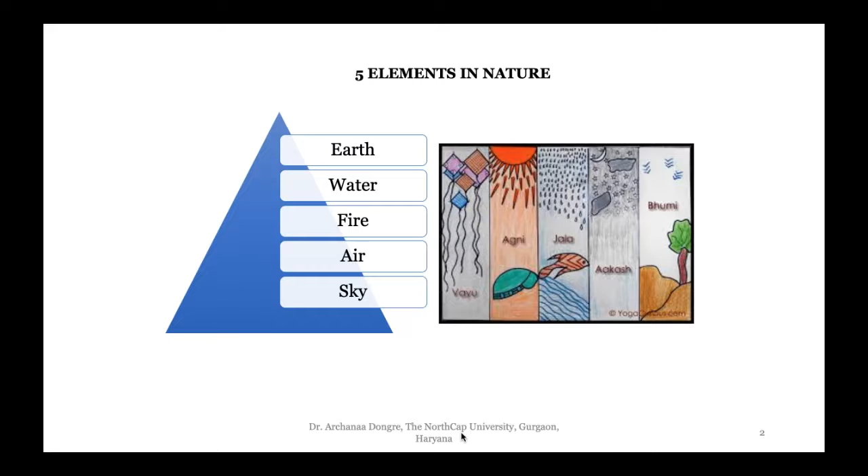We are actually working on each and every element, and there are a number of branches evolved based on these 5 elements. In fact, total elements are only 5, but branches are maybe more than 10. I have specified here very few, like structural engineering, environmental engineering, water resource engineering, transportation engineering, geotechnical engineering, earthquake engineering, remote sensing and GIS. So many engineering branches, so many things are there.

We are literally progressing, but then why this trouble? Why are we facing this danger of earthquakes and overall imbalance? Currently we are in a lockdown situation. Somewhere most people also consider it a blessing to nature, because work has stopped, and nature is getting time to go back to its originality. So water is getting clearer, air is getting purified.

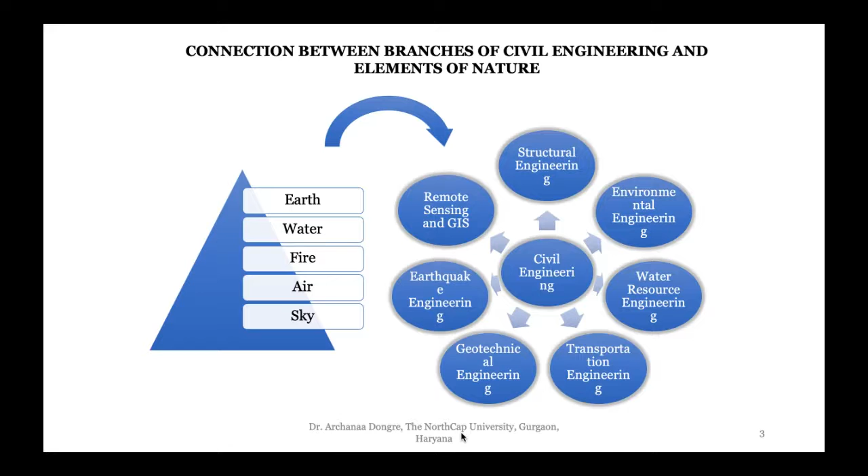Coming to civil engineering students, I always ask - it's the moment we enter civil engineering, mostly we ask, whatever structure-related problem we solve, every equation we solve, what is that basic principle? In civil engineering, the equation of equilibrium should be satisfied. That is very important. Equilibrium has to be there.

But we are part of nature. So nature and human beings, when they are in harmonious existence, there will definitely be harmony and happiness. But what is happening currently? The current scenario is totally opposite. We have literally exploited Mother Earth, and now we are in a questionable existence. This is the scenario we are facing, and it's actually very challenging. A challenging future is ahead of us. So if we do not step back and find a solution, think over how we can help in this scenario, we will be in trouble otherwise.

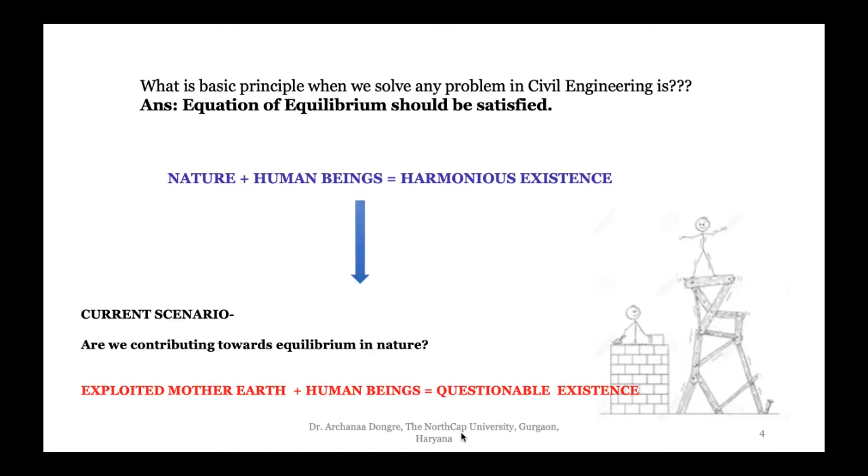Our India, our country, we have witnessed such a great civilization, and we have seen how without having great techniques, there used to be great structures in our country. Nalanda University is an amazing example - even now people are doing research on it. Then Mohenjo-daro is there, the Hampi Virupaksha temple is there. So there are many more examples of how ancient civilization managed all these things.

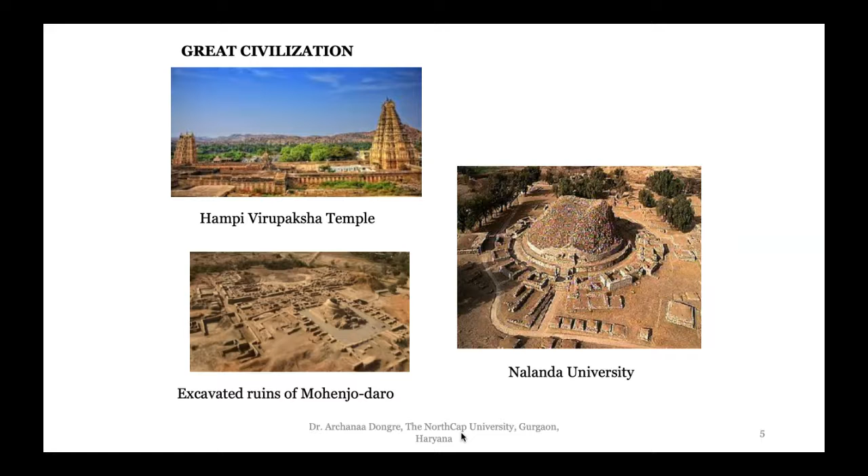Coming to villages in India, actually, if we see, villages are the ultimate. Villages are close to nature and they are actually sustainable. Now, every now and then we see government policies mention sustainability. Sustainable is the new definition of progress. But does that mean, because villages are sustainable, we are going to move towards the villages? No, that is not going to happen. But yes, we have to keep in mind that villages are ultimate - they are very good examples of sustainability.

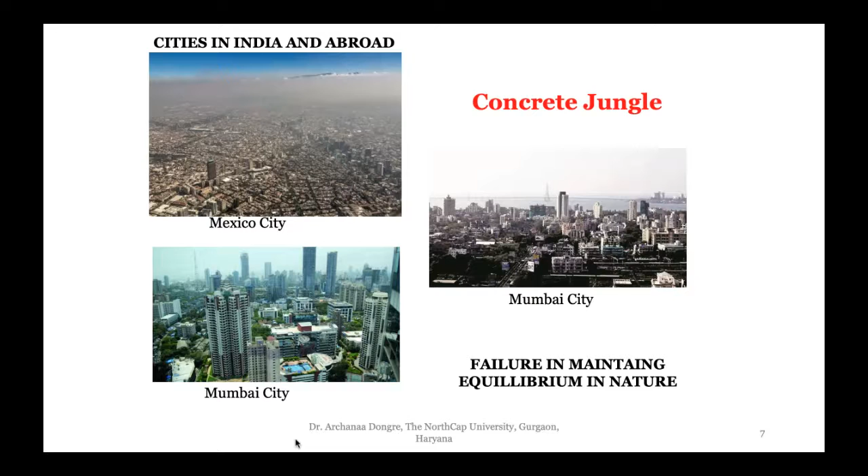Coming to our cities, it's full of concrete jungle. Take any city in the world - I have kept pictures here. This is Mexico City, then Mumbai City, full of concrete jungle, and we have utterly failed to maintain the equilibrium in nature. Those 5 elements need to be in balance, but we have literally failed in that. I have also kept examples of Delhi, Bangalore, Ahmedabad - the reality is that the 5 elements are not happy, they are not in equilibrium.

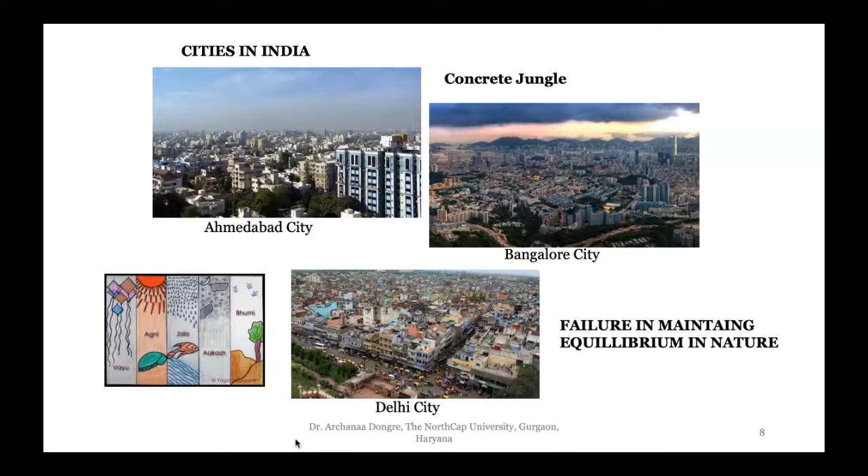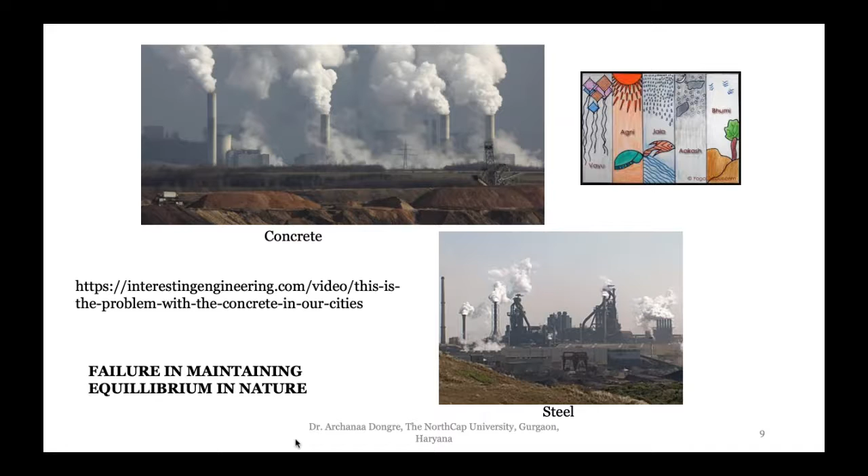Coming to pollution - air pollution. This above picture is of a concrete industry, and the below picture is a steel industry. See the amount of pollution. Everyone knows this - maybe I am giving a webinar now, so you are seeing this, but this is the reality. What action are we going to take? Being civil engineers, I feel we have to think in this direction, because we are the ultimate contributor to this - direct contributor to nature's degradation.

Other than this, there are many disasters. We see road accidents - 400 people die per day, and you won't believe it, now we are hiding in our homes due to fear of coronavirus, but in road accidents, 150,000 people die per year in India. Air pollution causes 12.4 lakh deaths in India, and 6.1 million people die worldwide due to air pollution. And if we add the data of floods, droughts, cyclones, then the number is so huge.

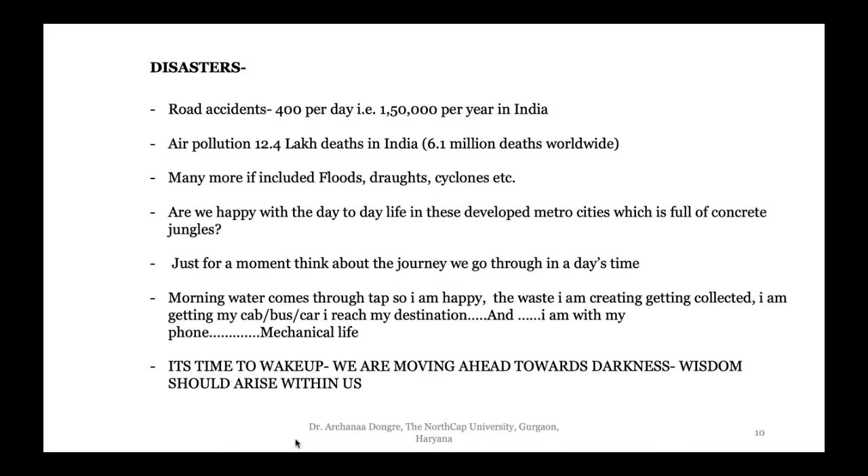So what are we doing? Are we happy with the day-to-day life in these developed metro cities, full of concrete jungles? Yes, we are seeing our satisfaction - our job is here, all facilities are here, and we are really happy that, okay, morning I'm getting water in my tap. And if I have to go to my office or university, I get a cab, a bus or auto, and it's all continuous from morning to evening. My day is very good, so I'm happy with this. But I think, yes, it's our time - it's a time to wake up, and we have to bring wisdom within us. Otherwise, we are continuously moving towards darkness.

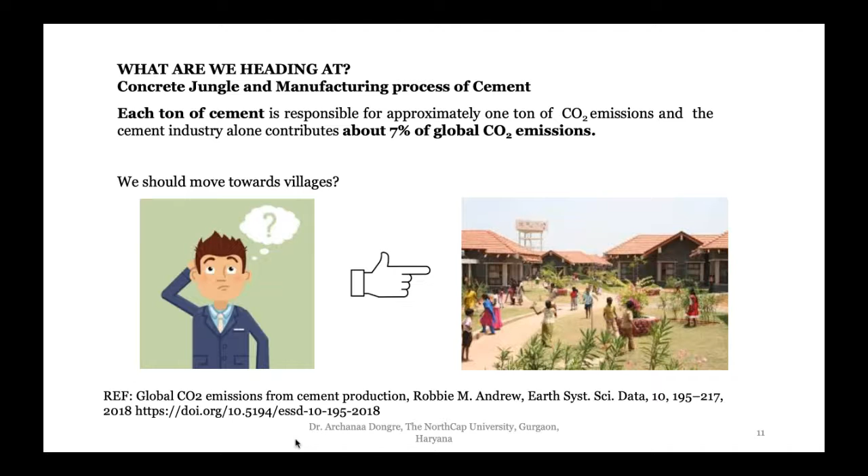Now so many times I'm telling cities and villages. Let's see what that ratio is. We'll come to that. But before that, for civil engineers, I would like to say, over the last many years...

The definition of civil engineering has evolved from directing the great sources of power in nature for the convenience of man — that was an 1828 definition — but now civil engineers are the custodians of the built and natural environment. This shift shows a fundamental change in the relationship between engineers and the natural world. Man and nature are not separate entities. Engineers today must design for a planet with limited natural resources, complex problems, and increasing environmental concerns. So civil engineers need to think and find solutions.

Number one is hold safety paramount — civil engineers need to be very careful that safety is there. Then, service with competence — one should be competent in their work. And issue true statements — here I see most of the problems, for whatever reason, so we are again going to come to that topic.

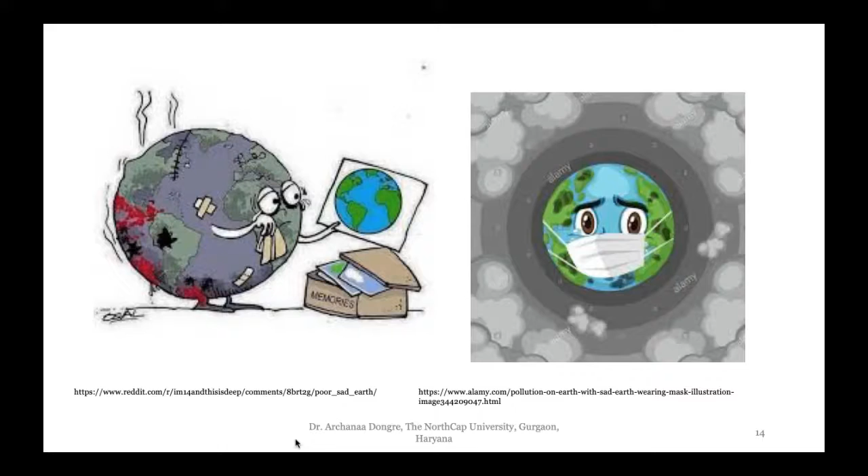Coming to earthquakes — these are beautiful pictures I found. We started the first lecture of this webinar series with this topic, and most of you have already been through the basics of earthquakes, but I'll briefly take you through that awareness again.

So are we really waiting for that big disaster to happen and our buildings to collapse? No. Then what is that? We really have to see that our buildings are earthquake proof. My topic belongs to rural areas, so I'll take you there too, but whenever it's going to happen, it's not in our hands — still we have to check that our buildings are safe or not.

If we are not able to check ourselves, there are so many websites available which will tell you whether your building is safe or not. IIT has also developed some software where we can see if our building comes in a safety zone or not.

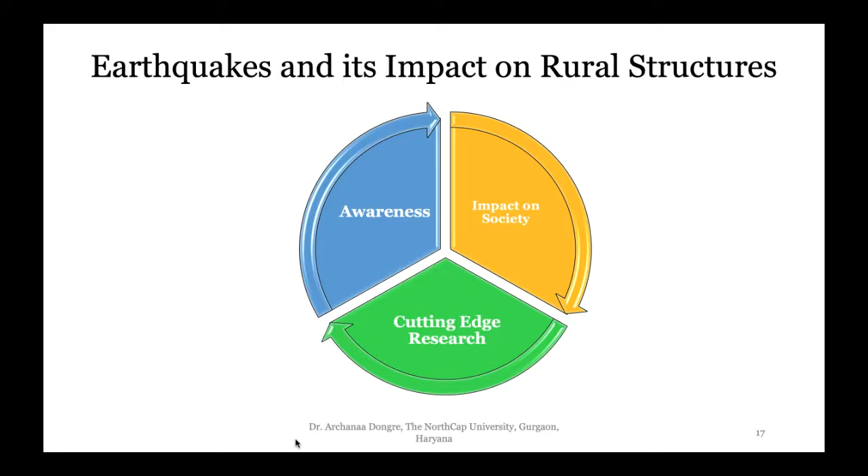How is your type of building structure? Is it not coming in a soft story effect? We have to check many factors, and we have to be really careful because yes, the North region is comparatively at risk, and we have to be careful about this. So this particular presentation is moving around the awareness about this whole earthquake and rural structures, then what is its impact on society, and what is the cutting edge research. That's how I have planned it.

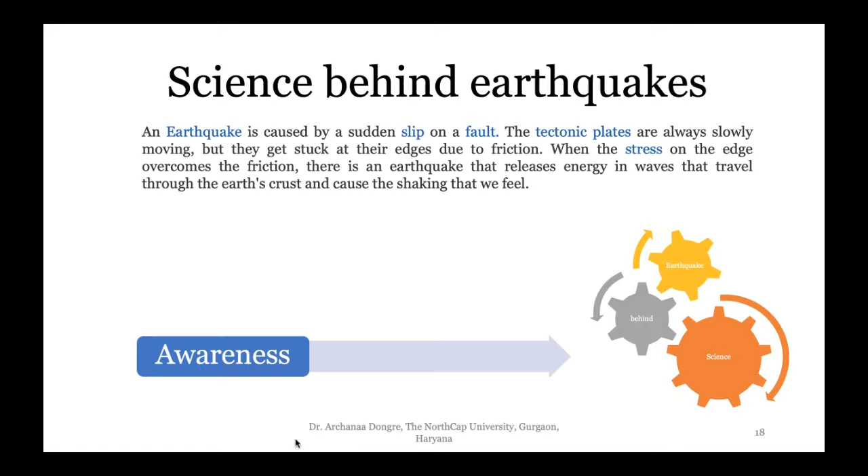Coming to the science behind earthquakes, an earthquake is caused by a sudden slip on a fault. The tectonic plates are always slowly moving, but they get stuck at their edges due to friction. When the stress on the edge overcomes the friction, there is an earthquake that releases that energy. And when they release their energy, it releases in the form of waves that travel through the earth's crust and cause the shaking that we feel - that is an earthquake.

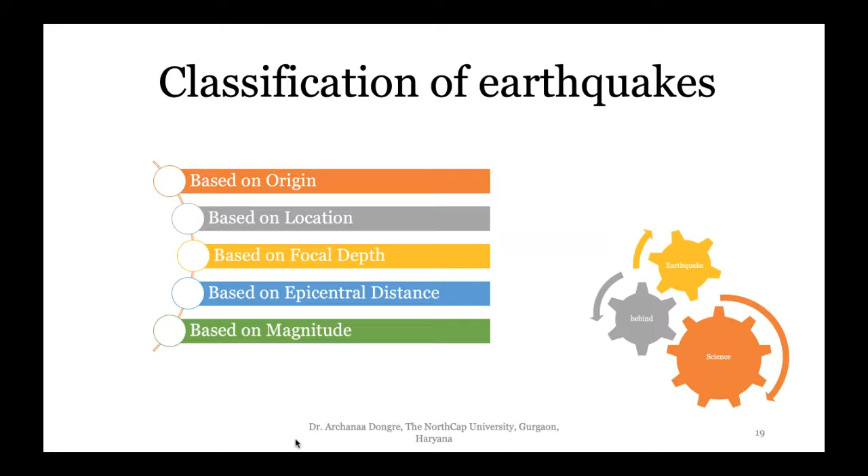Coming to the classification of earthquakes, there are a total of 5 classifications. Classification is based on origin, meaning where it has occurred, then based on location, based on focal depth, based on epicentral distance, and based on magnitude.

Based on origin, there are 6 parts. Tectonic earthquakes are caused due to the movement of tectonic plates, and they are generally of high intensity. Next is plutonic earthquake - these are caused due to the deep seated movement of molten magma, and they are generally of medium intensity. Then explosions - this is our contribution to earthquakes. The ground shaking caused by the release of enormous nuclear energy due to the underground detonation of nuclear devices. So this is humanity's contribution.

Then there are collapse earthquakes, volcanic earthquakes, and reservoir induced earthquakes. Reservoir induced earthquakes are specially attributed to the lowering of shear strength of the rock due to increased pore pressure in the vicinity of the reservoir, that is already strained from tectonic forces, and because of the storage of water. So this reservoir adds stress contribution which triggers a slip or increased pore water pressure, which lowers the shear strength of the fault. The Koyna earthquake is a very good example.

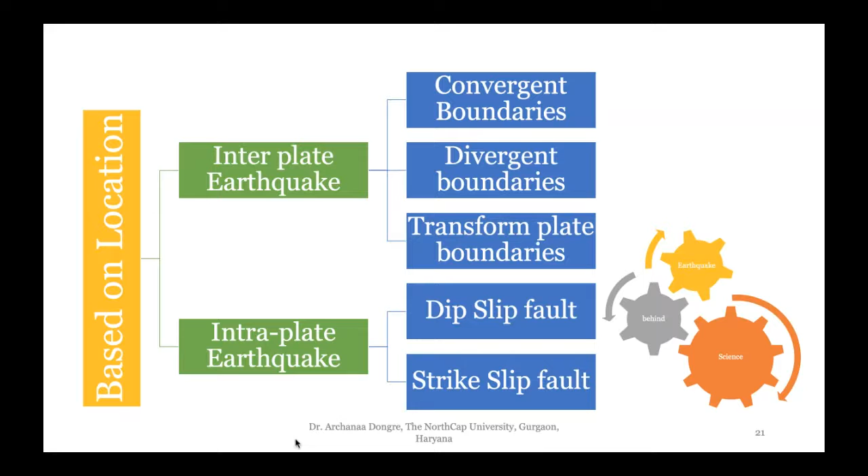Convergent boundaries are where tectonic plates move towards each other and give rise to mountains. Divergent boundaries are where tectonic plates separate and move away from each other. Transform plate boundaries are where plates slide past each other.

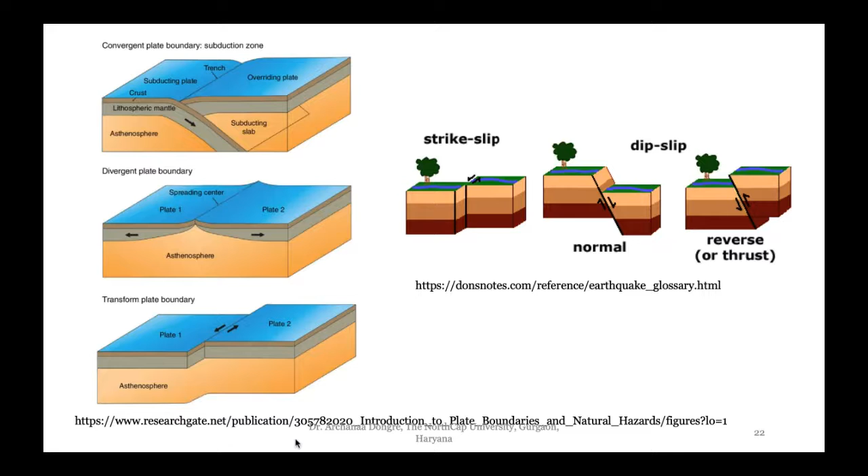Coming to intraplate earthquakes, such earthquakes occur within the tectonic plates due to internal rupture owing to the presence of faults in the rock strata. These fault boundaries are of two types depending on the direction of relative displacement: dip slip fault and strike slip fault. In dip slip fault, relative displacement of rock masses is vertical at the fault surface. In strike slip fault, relative displacement of rock masses is horizontal and sideways at the fault surface.

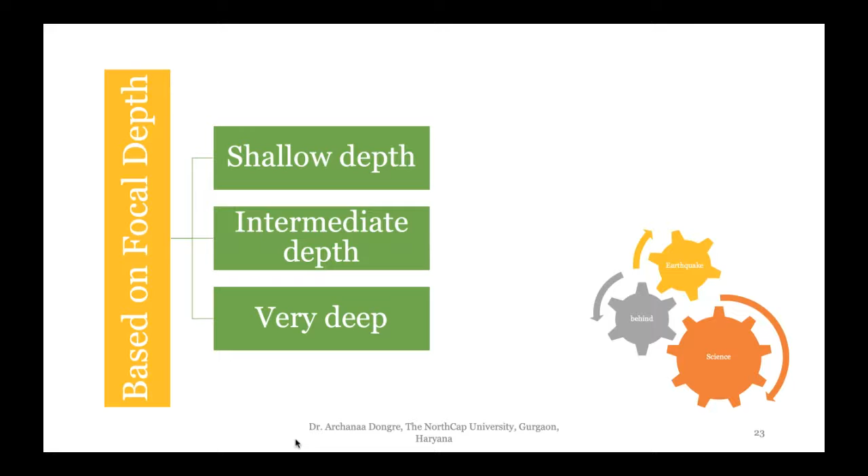Then the next type is based on focal depth - is it shallow depth? Mostly focal depth less than 70 kilometers, and it covers a very small area, and is severely destructive in nature. Next is intermediate depth - this occurs at a focal depth of 71 to 300 kilometers, covers a large area, and is very destructive in nature. The third type is very deep - these occur at a focal depth greater than 300 kilometers, cover a very large area, and are comparatively less destructive in nature.

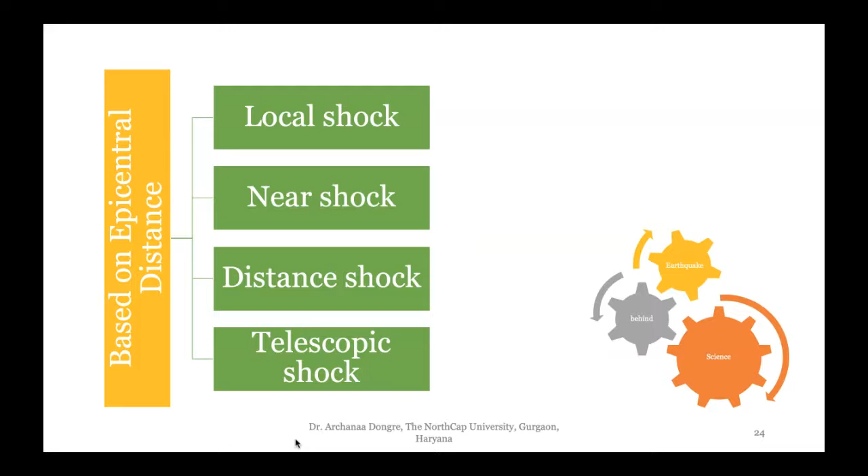Then based on epicentral distance, there are 4 types: local shock, near and far end earthquake - we say distant shock - and teleseismic shock. Then there are earthquakes based on magnitude: micro earthquake, moderate earthquake, strong earthquake, major earthquake, great earthquake, and intermediate earthquake.

Micro earthquake is where magnitude is less than 3. Intermediate earthquake is where magnitude ranges from 3 to 4.9. Moderate earthquake is where magnitude ranges from 5 to 5.9. Strong earthquake is 6 to 6.9 magnitude range. Major earthquake is where magnitude ranges from 7 to 7.9. And magnitude greater than 8 is a great earthquake.

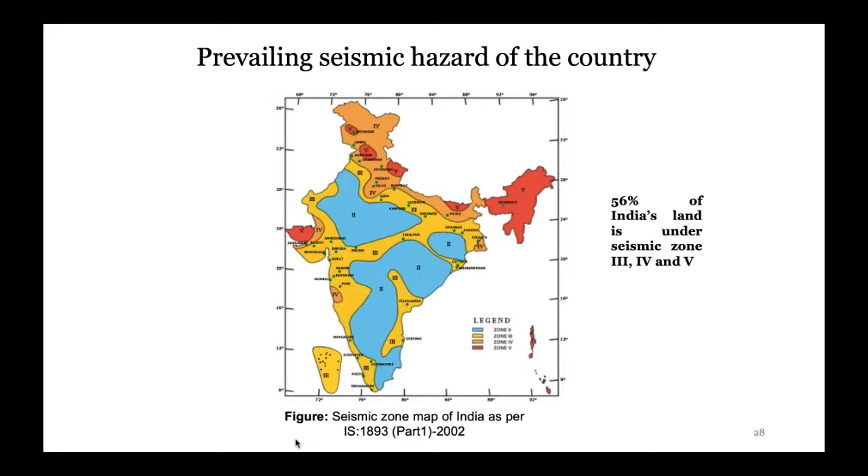Coming to the prevailing seismic hazard of the country, if we see the seismic zonation map, our map is actually divided into four parts. Initially there used to be 5, now there are 4, and you can see which region you are sitting in, whether it is seismically safe or not. This seismic zonation map was developed in 2002, and revision happened in 2016. So 56 to 60% of India's land is under seismic zone 3, 4, and 5 according to this map.

Now this particular picture is of 2002. After the Bhuj earthquake, great work was done, and people suddenly came to know, okay, there is nothing like zone 1. So that was removed from the zonation map, and the exclusive work was done by Professor Sudhir K. Jain and C.V.R. Murty sir, with a good team. This work comes from IIT Kanpur. I have specifically written here as 2002 work, because I'll also take you to the 2016 work and show you the graphs there.

Here we can see that India lies at the northwestern end of the Indo-Australian plate, which encompasses India, Australia, a major portion of the Indian Ocean, and other small countries. This plate is colliding against the huge Eurasian plate and going under it. This process of one tectonic plate getting under another is called subduction. So our plate is continuously moving towards the Eurasian plate, going down under it. That's the fear we have, when it is going down.

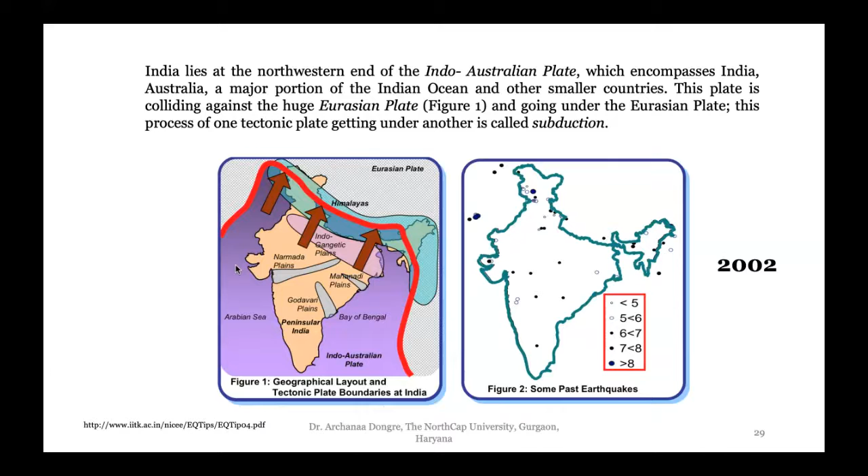We don't know when it will release that stress, and that will definitely cause the earthquake. It may take a few years, or some IIT professors are saying it may be any time, this is the time, or it may come even after 50 years, 100 years. The right figure is showing the past earthquakes and their magnitudes. Now this is 2016, a great work by Sudhir K. Jain sir.

Here he has shown how that region has three main subdivisions of the Indian subcontinent, namely Peninsular India, Indo-Gangetic Plains, and the Himalayan region. These are the regions shown in the picture.

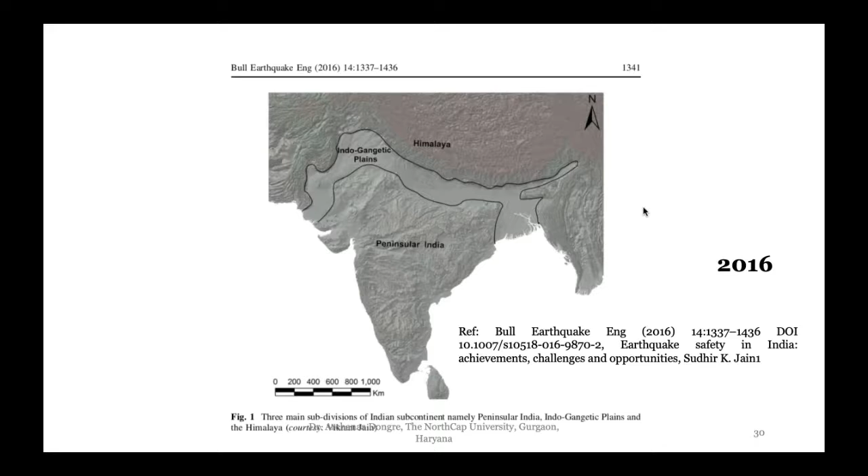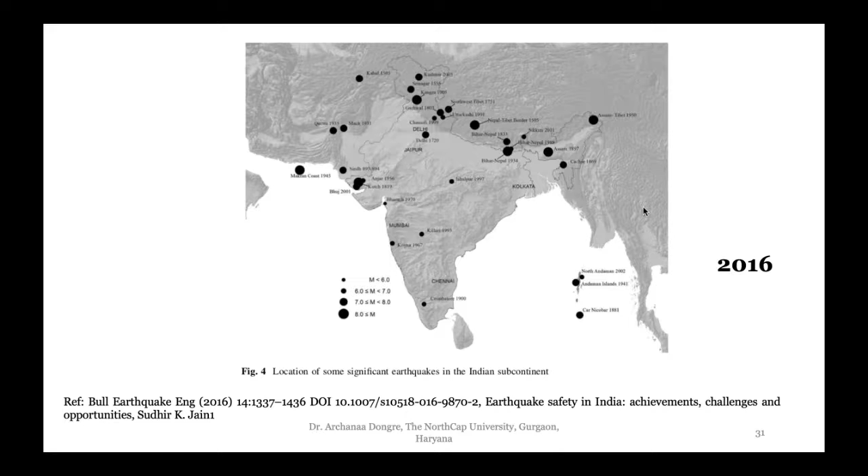Now if you see this, the magnitude of earthquakes. This is not the latest, this is also 4 years before, but magnitude 8 earthquake after the Nepal earthquake, that area became, you can see the big dot here. So magnitude is 8 and more, and this shows how that particular belt is so active.

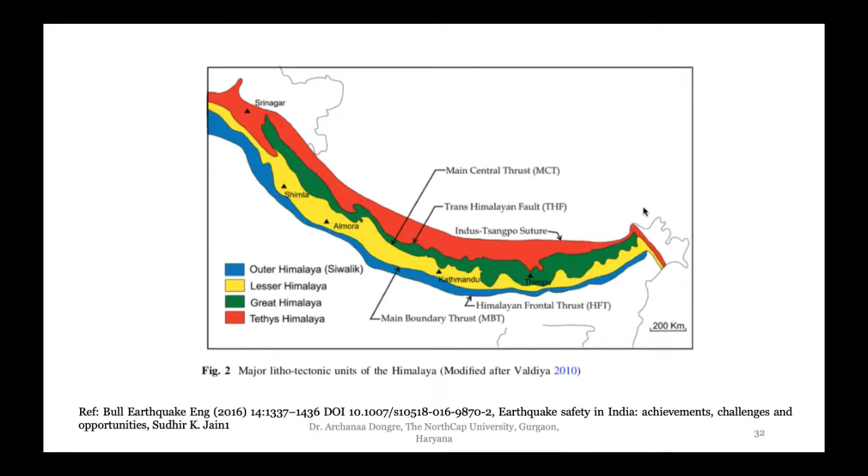Coming here, when we zoom in on that particular belt, we can see the Tethys Himalaya with red color zone, and then the Great Himalayas with green color. Then there is the Lesser Himalayas and Outer Himalayas. So we can see the boundaries and major lithotectonic units of Himalaya, where this is a more earthquake-prone region.

Now, there has been a regular occurrence of great earthquakes in the Himalayas, and currently most of the seismic activity is located south of the Main Central Thrust. The Himalayan Frontal Thrust is believed to be the likely location of future great earthquakes because of its proximity to the densely populated Indo-Gangetic plains, and this poses a very serious risk for the future, and has been a major cause of concern in the scientific and emergency management communities.

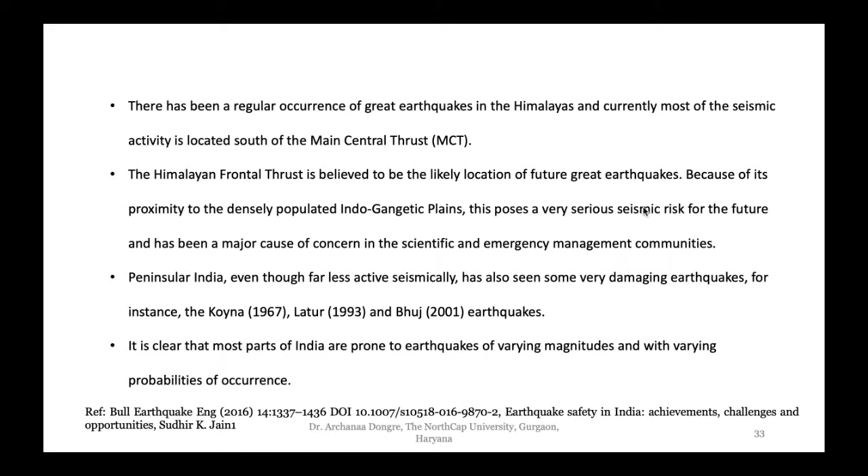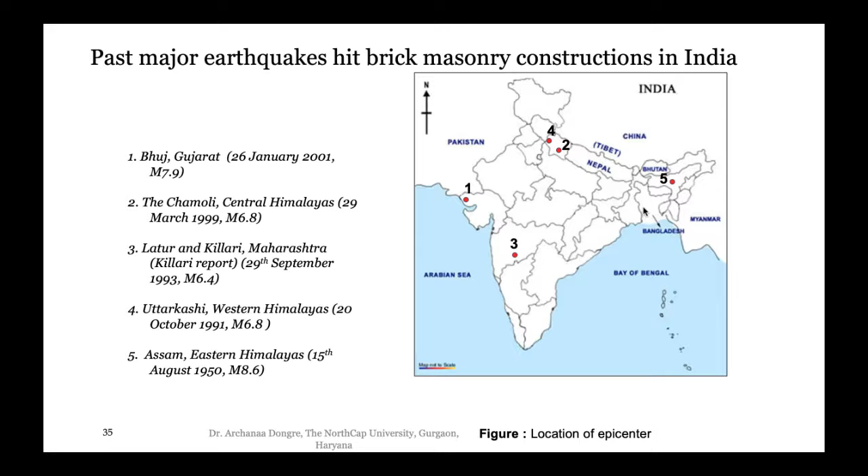In my study, I considered 5 locations of the country where mostly rural structures with brick masonry buildings are present, and which were affected by earthquakes: Bhuj, Chamoli, Latur-Killari, Uttarkashi, and Assam.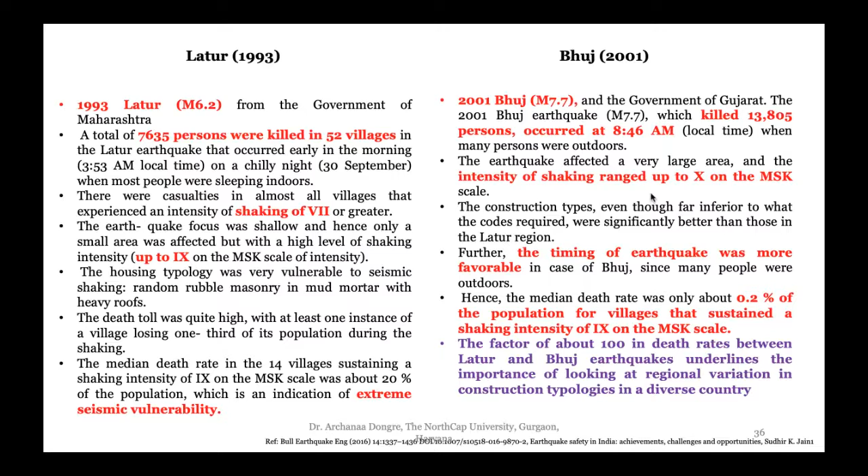India has 6 lakh to 1 million villages and around 100 smart cities. If we are sitting and listening to this lecture in a smart city, I want you to be aware that there are 6 lakh to 1 million villages in our country where construction is happening without monitoring, where civil engineers are mostly not involved except in a few exceptional cases. People simply bring bricks and locally prepared mortar, and then construct those houses.

My work is basically on brick masonry houses. In past earthquakes, we've seen that many brick masonry buildings, whether load bearing structures or RC framed infill buildings, collapsed. Give this a thought: we only have 100 smart cities. Because we have the comfort of cities, we cannot ignore the many villages we have currently in our country and the number of houses there. It's a huge responsibility on the shoulders of civil engineers.

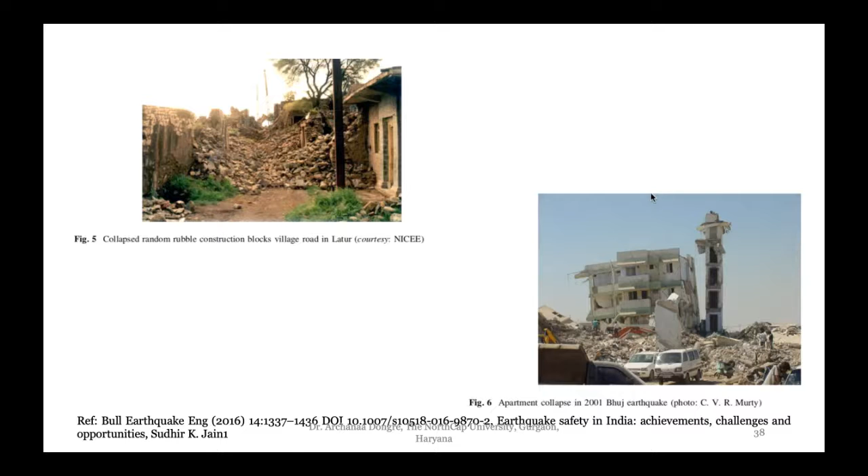These are a few pictures I kept: a collapsed random rubble construction block village road in Latur, and a building, an RC infill building, collapsed in the Bhuj earthquake. There are many more disturbing pictures, but I did not keep them. These are a few more pictures, and on the right side, people have reconstructed their own houses after the earthquake.

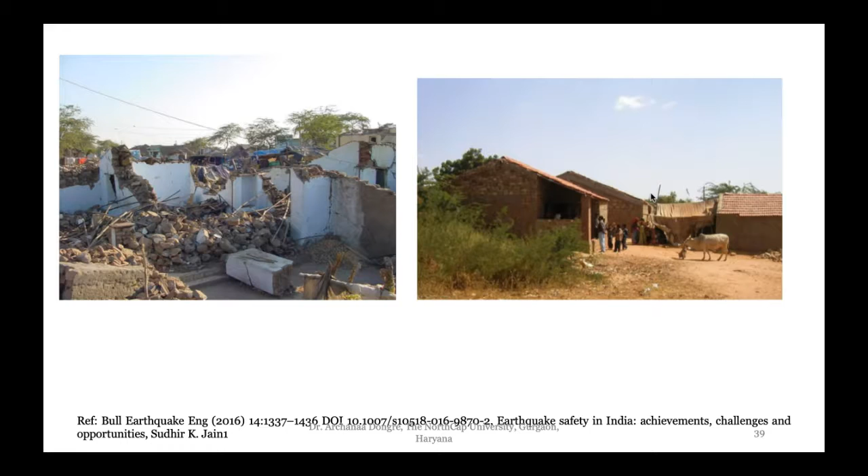The Bhuj earthquake of 2001 highlighted a striking disregard for structural design principles and quality of construction. This earthquake was the first instance of an earthquake causing collapse of modern multi-story buildings in India, and it triggered unprecedented awareness among professionals, academics, and the general public.

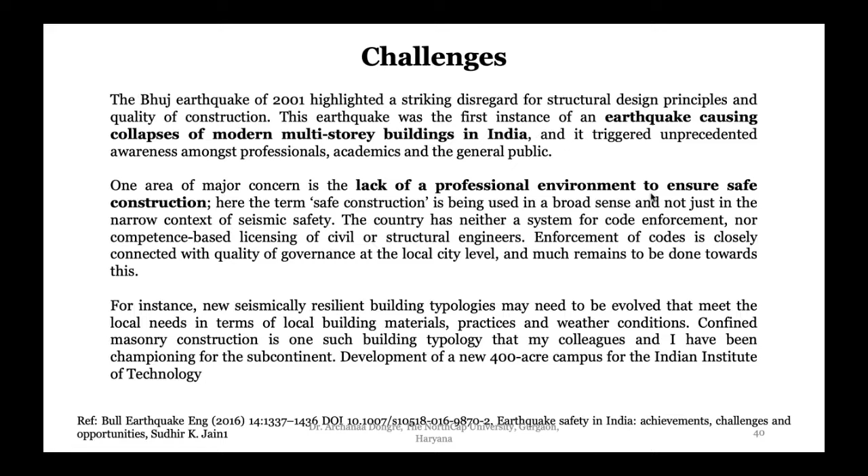Our major concern is the lack of a professional environment to ensure safety of construction. This safety of construction is very important. We have to have civil engineers, but we have really very few civil engineers who are trained enough.

So we need civil engineers to get the training and get them ready for taking up such challenges. Here are some important points. In order to execute a civil project successfully, one must ensure that the entire chain of those involved in the building industry is doing the right thing. Doing the right thing is very, very important. Most of the time, civil projects, except very big brand projects, most small projects have so many loopholes.

Proper monitoring is not happening, or sometimes if the supervisor is not there, wrong things may get done. Like a good restaurant must ensure hygiene at all stages of preparation, handling and service of food to guarantee it is not infected with bacteria, it is the same in the case of the building industry. All stages of the life cycle of a civil project - conception, design, detailing, construction and commissioning - must be done right for the project to be successful.

There are three types of challenges that can be faced in this process. The first is error of intention. We always say in our life, if you have done something wrong by mistake, it is okay, but if you have done it intentionally, then it's not a good karma. Our intention should be good, really good.

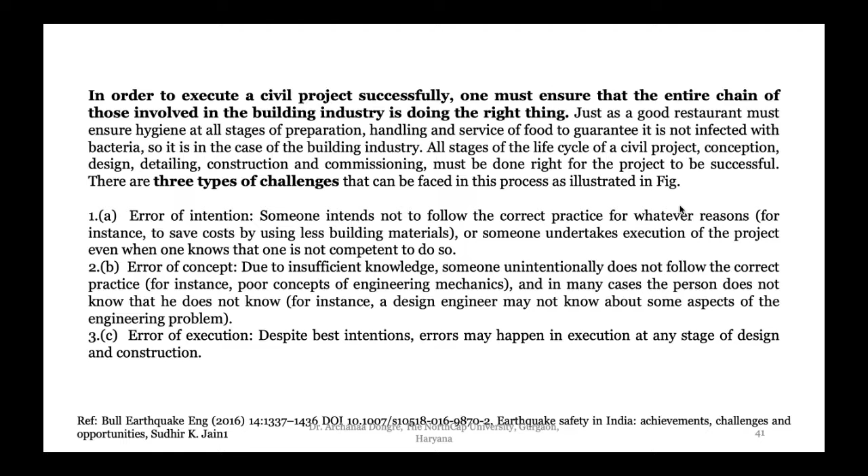In my work, I try to understand the behavior of brick masonry buildings during earthquakes, how that brick masonry building behaves. I have used the applied element method for this study. It was a Fortran program that my professor, my guide, brought from Tokyo University - a program from Japan.

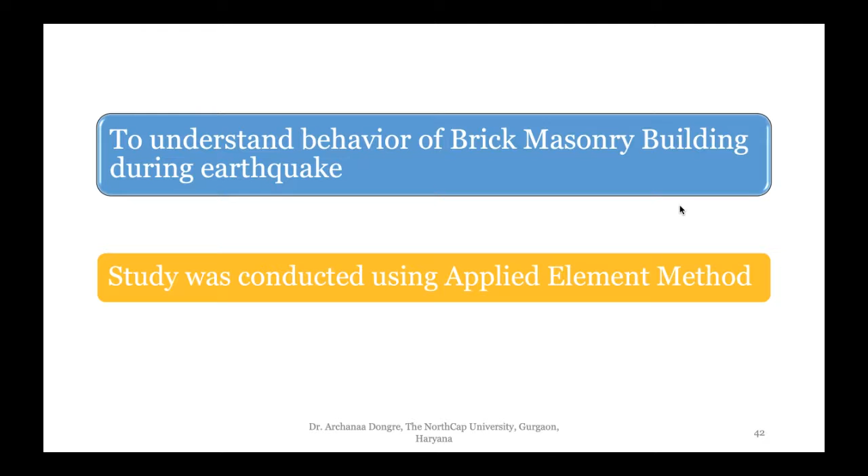To understand the behavior of brick masonry buildings, or any structural element, I want my students to understand a very basic concept: structural elements undergo three types of forces - either axial forces, or shear or torsion in the member, or flexure. Our whole analysis mostly revolves about this only - axial, shear or flexure. My study also consists of these things.

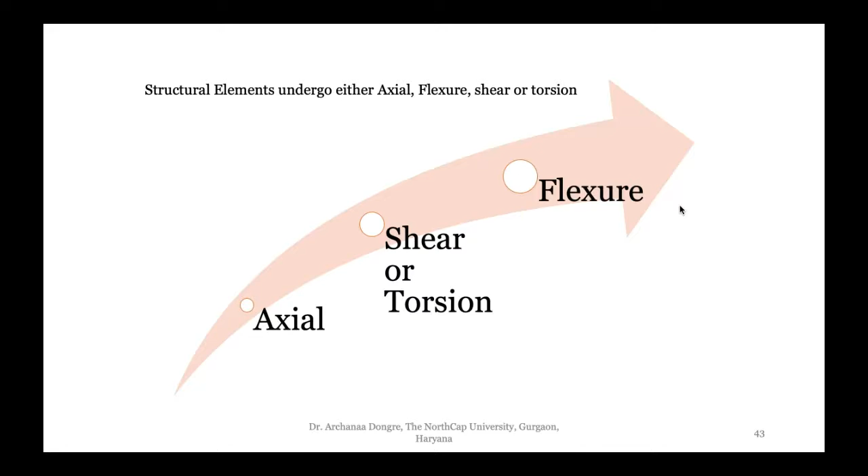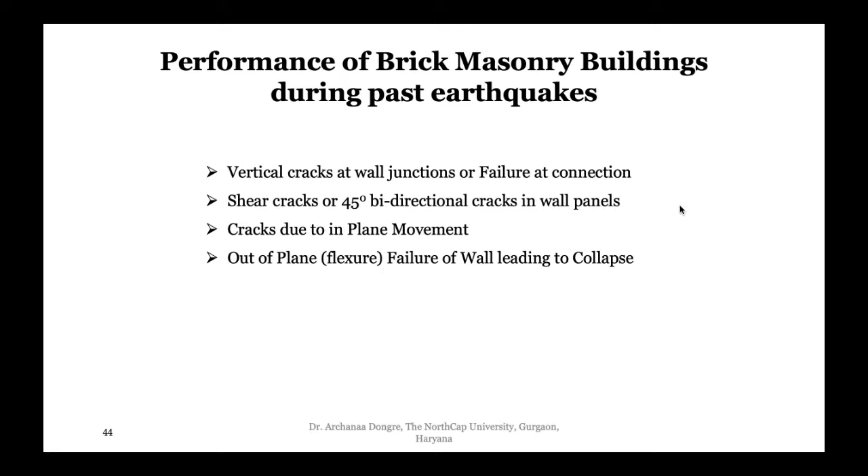When we looked at the performance of brick masonry buildings during past earthquakes, we found that mostly brick masonry fails by vertical crack - wherever the wall junction is, vertical crack happens there, called failure at connection. Then there is shear crack, also called diagonal cracks or 45-degree bidirectional cracks in wall panels. Then there are cracks due to in-plane movement, where the wall moves in plane - I'll show in a diagram. And there is out-of-plane flexure failure of the wall, leading to total collapse of the building.

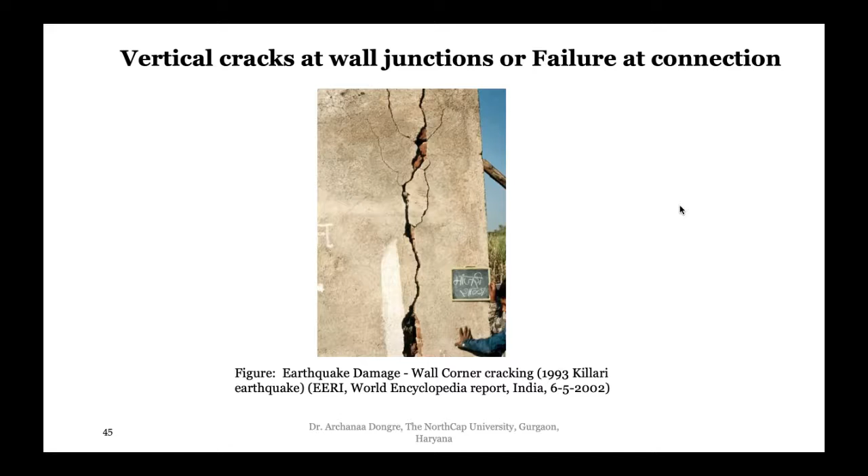Coming to these vertical cracks at wall junctions - here we can see at the connection, vertical crack happened. This was in the Killari earthquake.

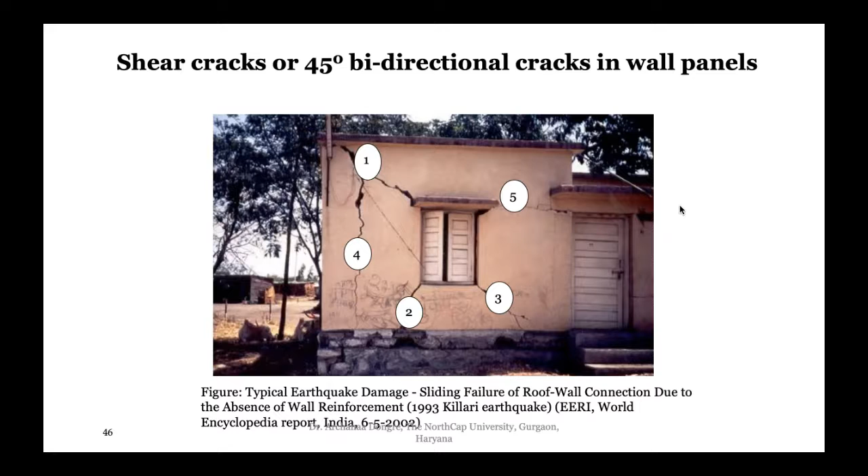Then shear cracks. We can see here there are 5 different types of cracks. Crack number one is at the wall and corner junction, and it's also a shear crack because of the shaking at the bottom during earthquake. This type of crack may lead to shearing of that particular wall panel. Crack numbers 2 and 3, and crack number 5 may be due to settlement at the ground. This is in fact a very beautiful example of how a brick masonry building behaves or fails during earthquake.

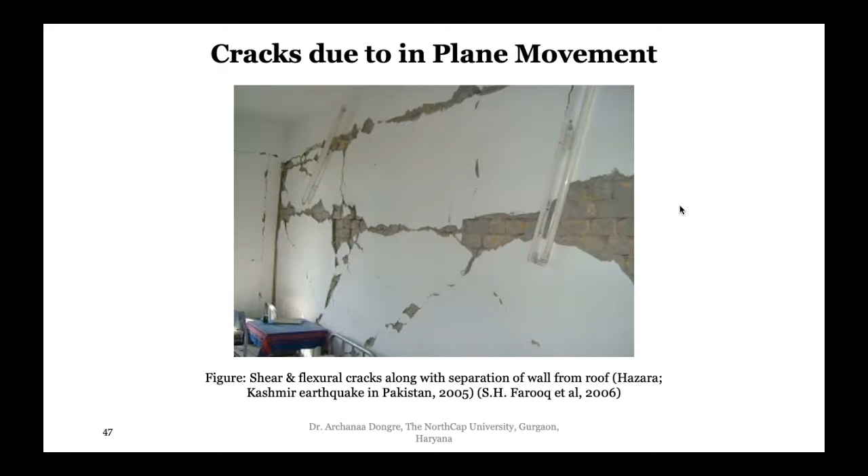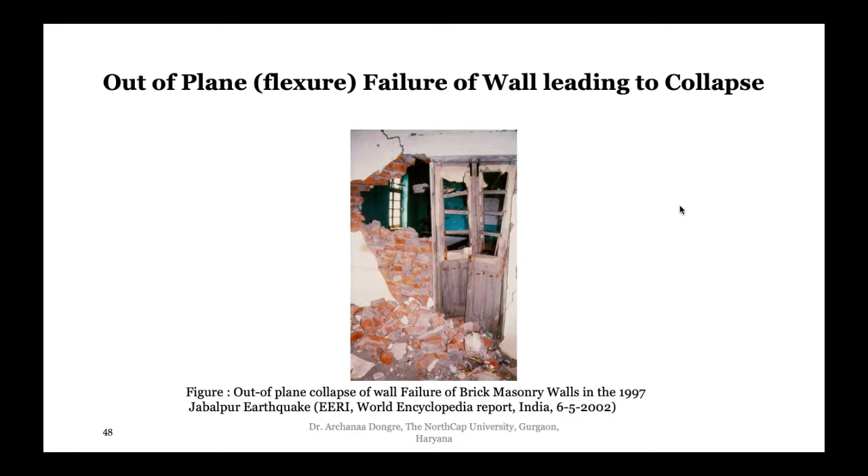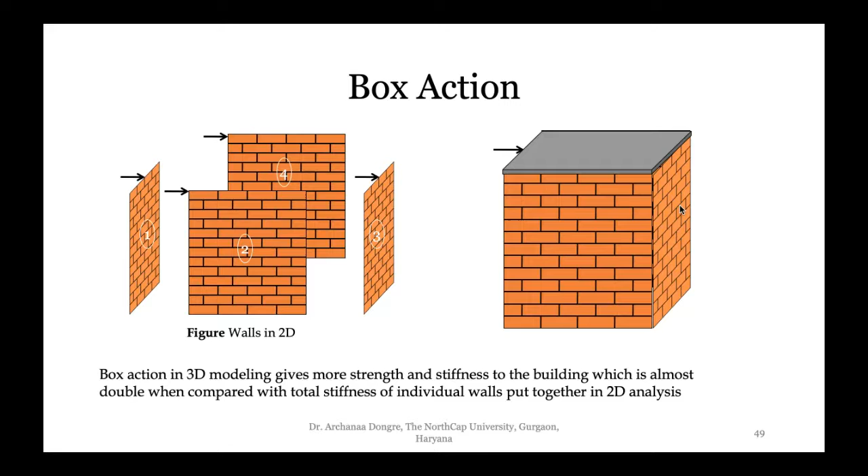Now for the applied element method, how do we understand the bricks? AEM is a computer program, so how do we model it? Experimental study is very expensive to do, so applied element method was capable of showing the failure of the building exactly. We compared the applied element method results for the wall and building with actual experimental results, and it gave a great match.

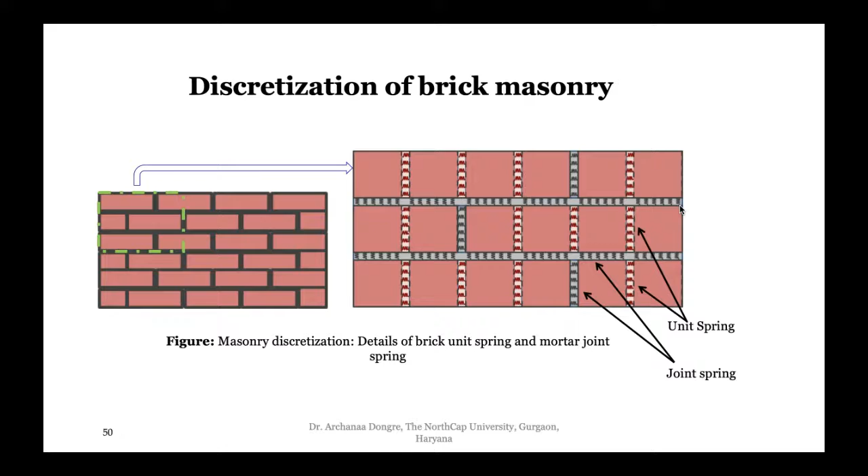In discretization of brick masonry, the gray area is one single brick. We divide that brick into parts, and assume those parts are connected with each other by springs, carrying normal and shear behavior. As I mentioned, our studies revolve around the stresses generated, which are captured by the normal and shear springs considered here. That's how the whole wall and building were modeled.

In one study, I considered walls of different lengths. The first diagram has a height to width ratio of 0.5, the second has a ratio of 1, the third has a ratio of 2, and there's a fourth case of 2 meters by 8 meters. This is just to study the aspect ratio.

This study was done before going for the seismic study, as a displacement control study. We gave a displacement to see, for a particular load, how much it would displace and how it would behave - itna load diya to kitna displace karega or kaise behave karega. That's what we see here.

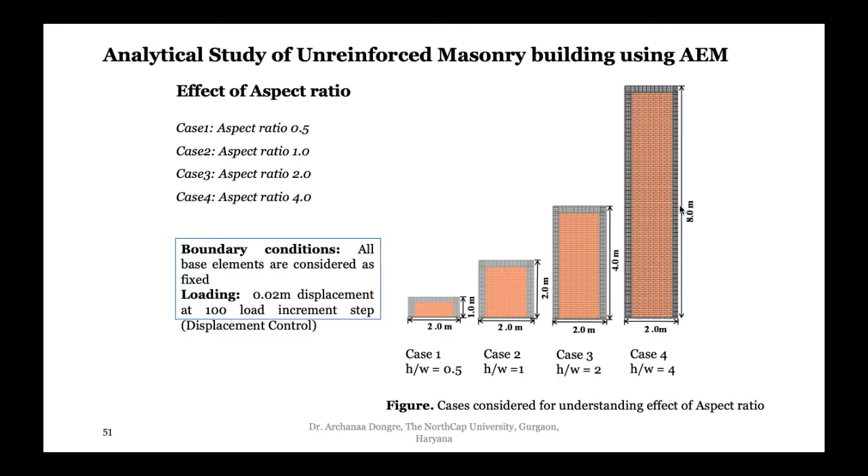In the small first wall, being small, it gives very good resistance. The second case is like our standard wall, where shear is predominant and a diagonal strut is happening, also giving good resistance. In the third case, because the height of the wall is more, flexure is predominant. And in the fourth case, flexure - meaning bending - is definitely predominant.

We can see that with aspect ratio 0.5, case number 1 gives really good load carrying capacity. Case number 2 is also showing good load carrying capacity, followed by cases 3 and 4.

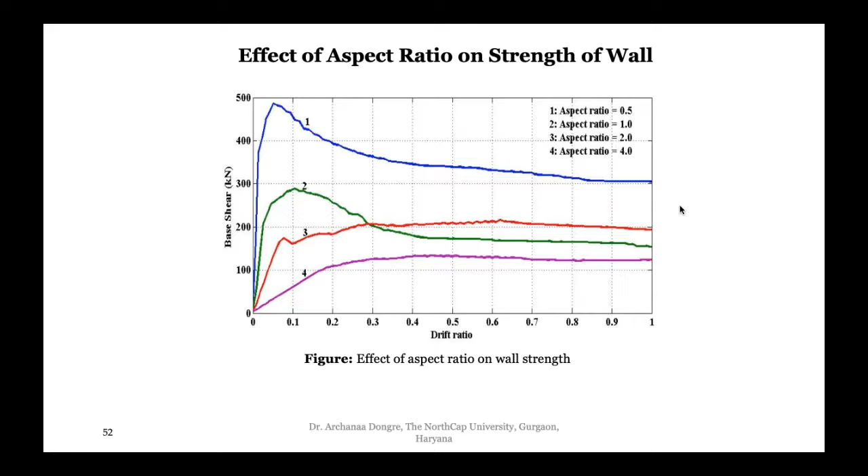Then I also studied the effect of doors and windows. Do you know we have so many doors and windows in our homes? Is it really good to have so many? Nowadays there's a fascination where people almost don't keep any wall at all, it's all full of glass. This is actually dangerous. What Western countries are following may not be good for us.

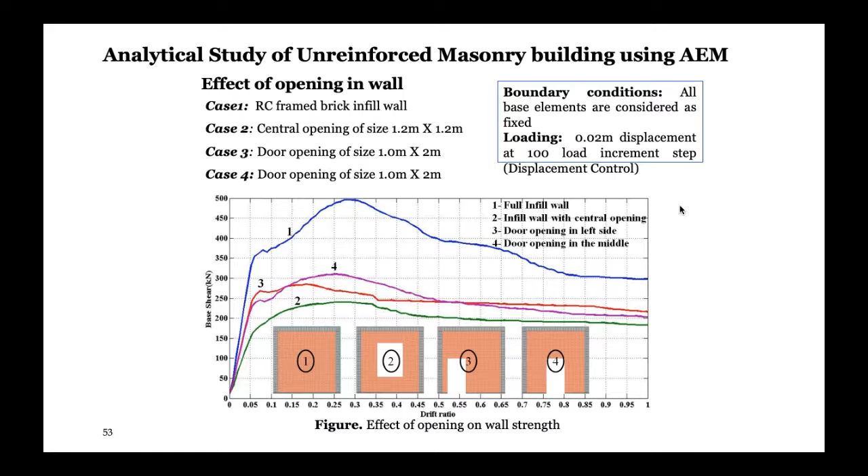Then case number 3, the door opening is at one side. So door 3 and 4 were giving almost the same good result only. Whether it is at the center or at one end, there is not a very big difference. It gives good strength comparatively, when only compared with 3 and 4.

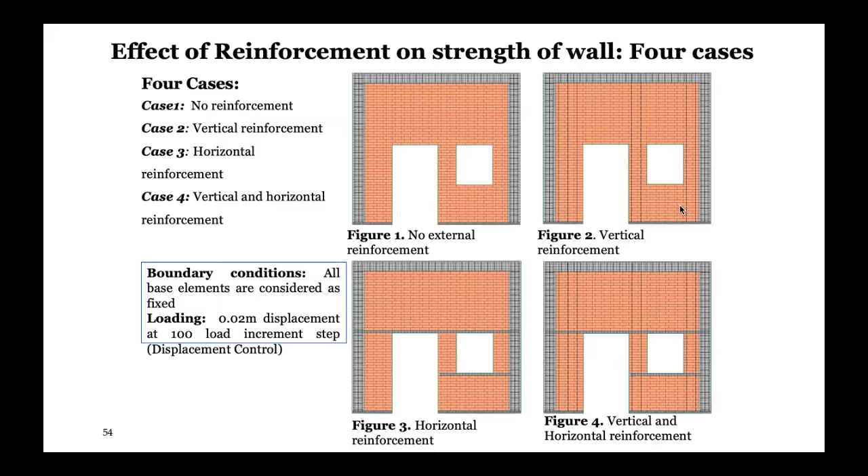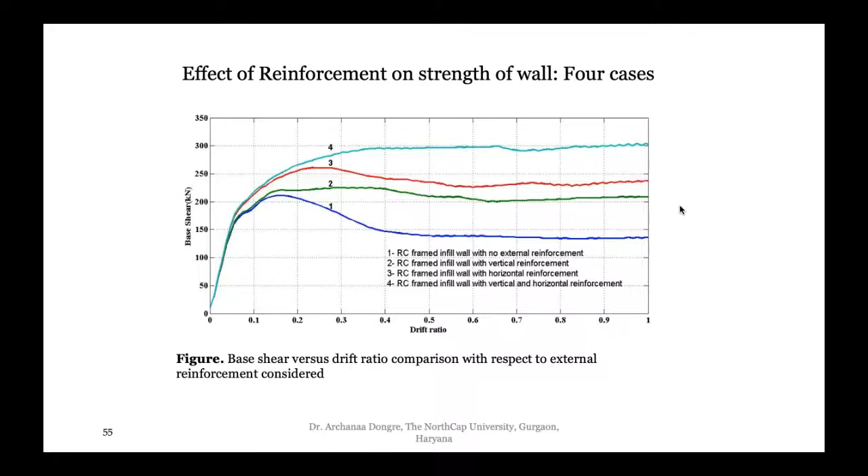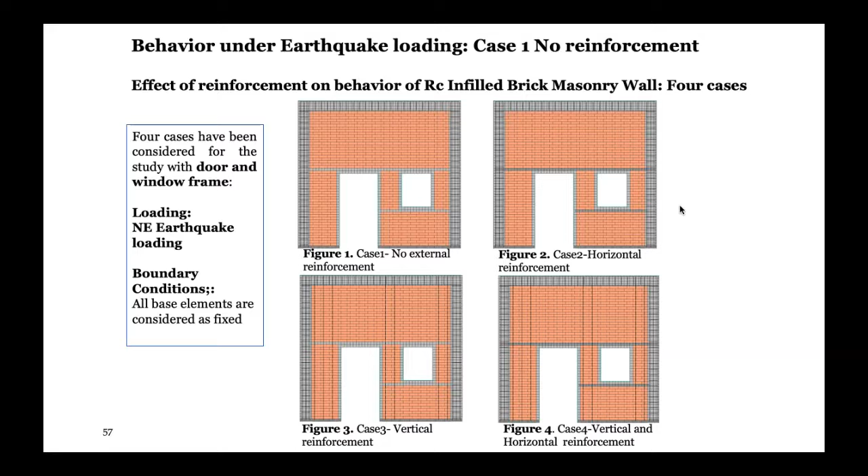So that is the behavior of such buildings under earthquake loading. Now here I have considered 4 types of earthquake, including the Northeast earthquake loading. So 4 cases have been considered for the study with door and window frame, the same 4 cases as I have discussed.

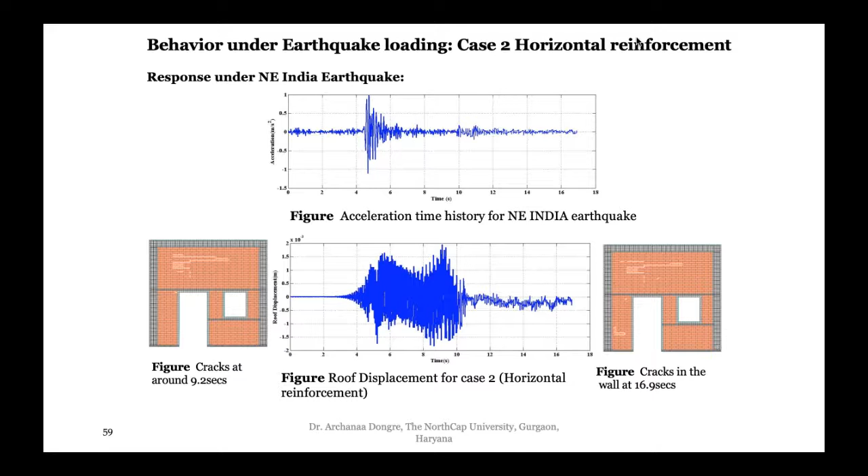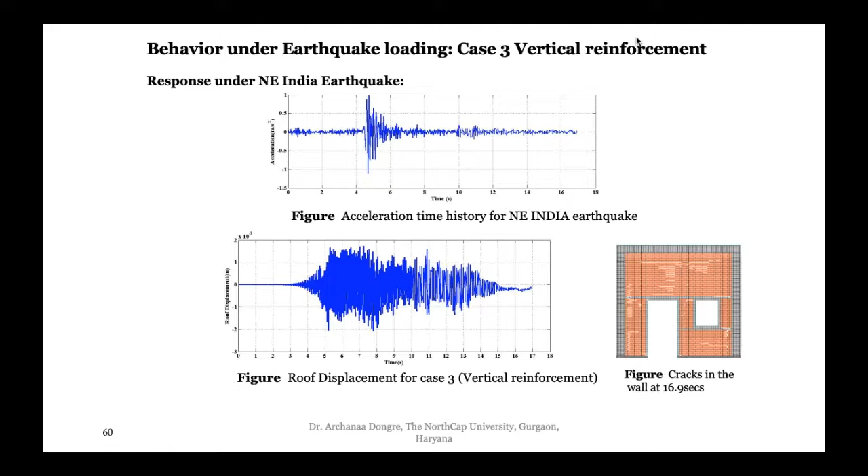Then the behavior of earthquake when only vertical reinforcement is there, with no horizontal reinforcement. In this case, there are slightly higher number of cracks at the end of 16.9 seconds.

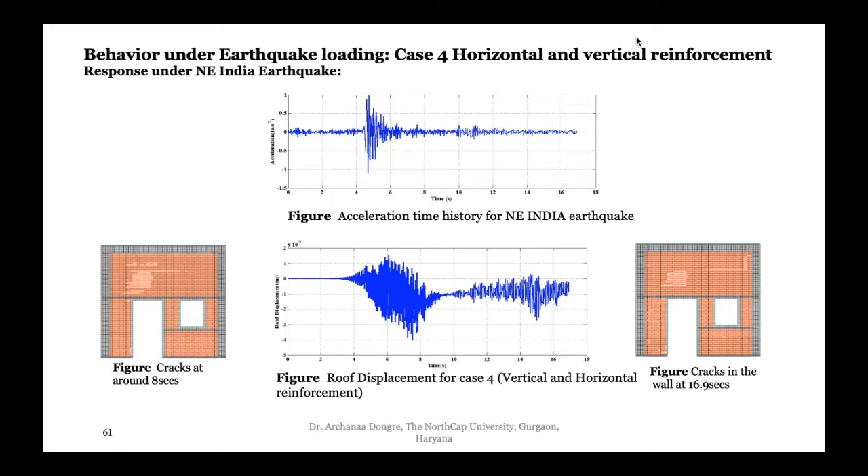Now when we collect all the results, here this was the result for case 1, no external reinforcement, case 2, case 3, case 4. Simply we can say that when external reinforcement is not there versus when we go for horizontal and vertical, whichever is economical to us, giving horizontal and vertical or both, we should go for that reinforcement, and that building will be strengthened with this technique.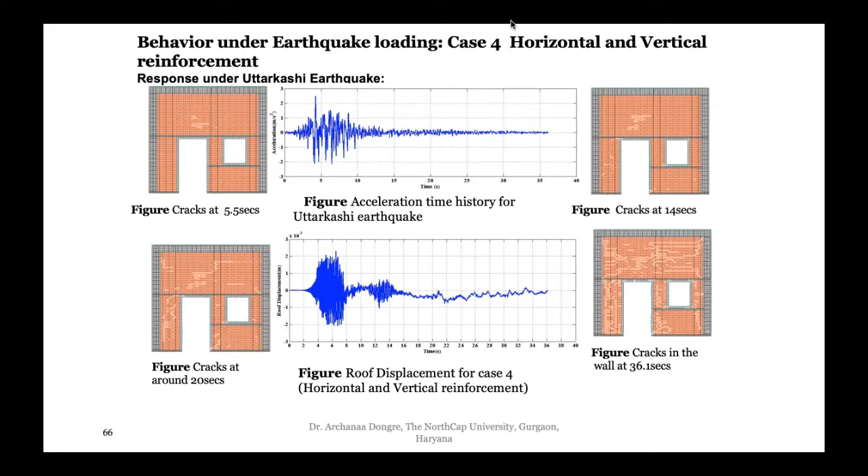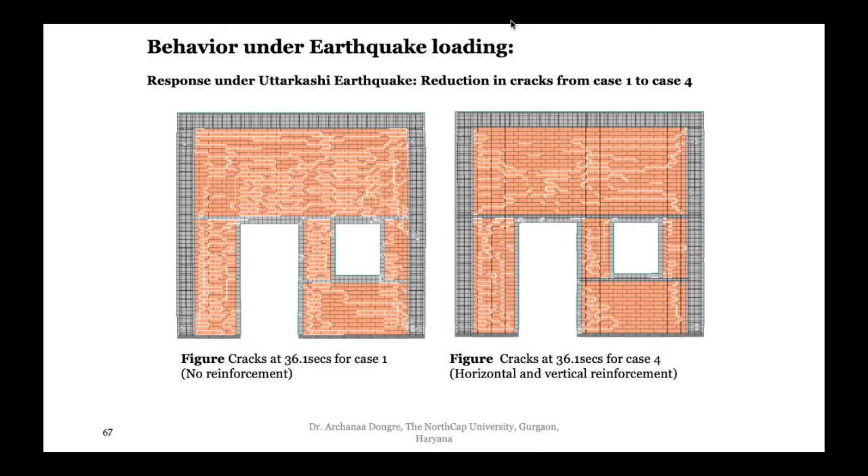Here is a zoomed version showing the cracks at 36.1 seconds. On the left, no reinforcement; on the right, both reinforcements are present, and the number of cracks is clearly reduced. We cannot totally save our structure, but at least we can save it from major damage and save lives. That is the main aim of this particular work. So this is all the results put together.

Now, this AEM method was developed at Tokyo University with experimental study. What I have done is a study at IIIT Hyderabad, and I think it is one of the first of its kind started there. But a similar study in a very thorough manner with experimental work was done by Paola at Tokyo University under the guidance of Meguro, in Meguro Lab, a very well-known name in earthquake engineering. They used PP band, polypropylene band, to strengthen those structures.

So very good work done by PP band for the strengthening techniques. So here in this, I'll show you this pictures here, PP band.

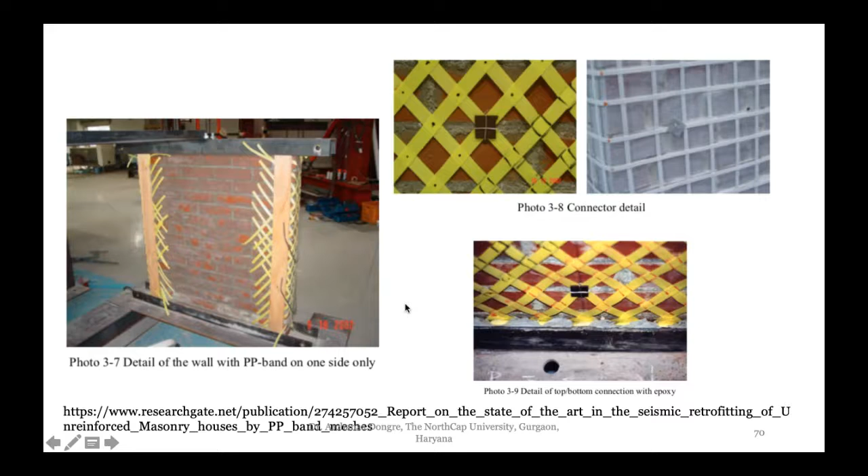And this is, we can see here how they are keeping those PP bands, covering the whole wall with the PP band, and then strengthening that masonry structure in seismic prone regions. And then after putting that PP band, they actually plaster it, and then they are testing it.

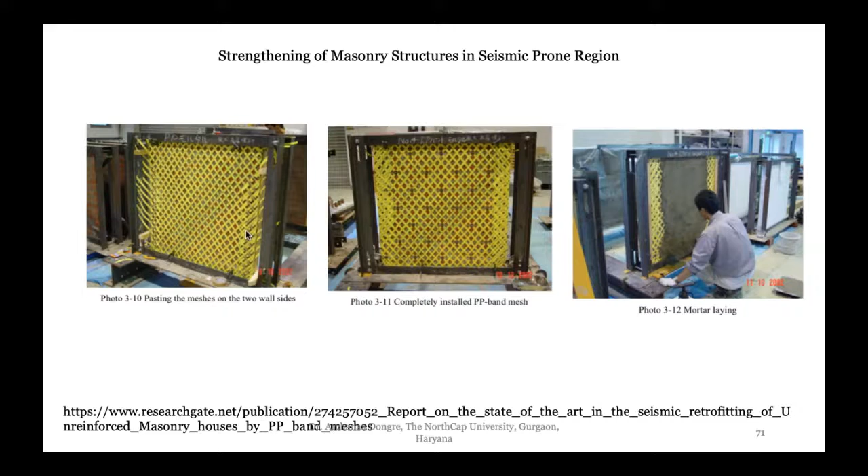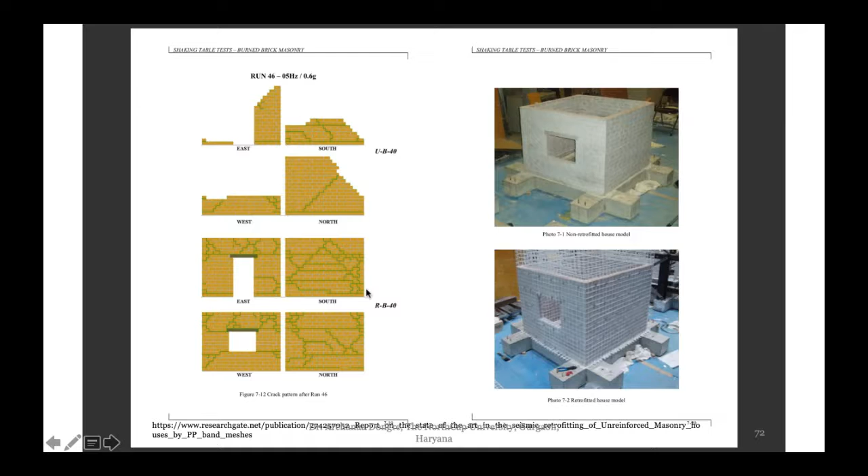So for this particular model, you can see that when there is no reinforcement, this whole structure, you can see how it is collapsed. And in the experimental study, when they studied the AEM for this particular structure in comparison, there are a good number of cracks, but it is still showing good behavior.

So I think this is the work for brick masonry building. And what is the takeaway from this presentation? I want to take you back to the start of the presentation.

At the end, I told you about my work in brick masonry area, because as I told you, it was a reminder that there are more than 1 million villages in our country. Just calculate how many brick masonry buildings will be there, and that too non-engineered, meaning there is no civil engineer to look after it. And how are we going to face such a disaster if really an earthquake strikes in such a scenario.

So in this case, how are we going to help in such a scenario? Strengthening of building is number one. First we have to understand how we are going to strengthen our buildings, and that's how we have to start working seriously. At least we should be ready, hopefully.

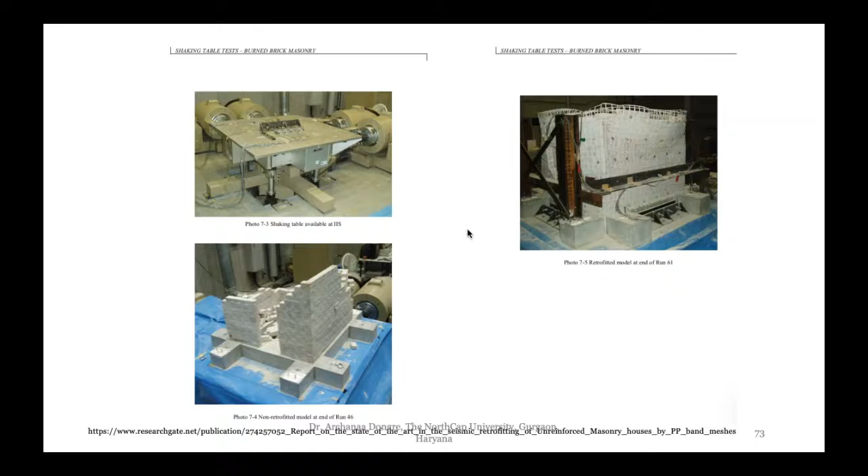Just because that earthquake may never come to us in our lives, it's still our responsibility to strengthen our buildings. So finally, the takeaway from this lecture: I have reminded you that India witnessed a rich ancient civilization, and they were much better than us. Now in terms of engineering development, we are growing in a really big way, which they did not experience, but at that time earth was in balance.

It was in balance. Now what is the responsibility of civil engineers as global leaders? We are civil engineers, we are global leaders, yes, and we are the great doctors if we give our service rightfully, and we follow the code of conduct. That is our main aim, that we have to follow all ethical policy, and corruption is one thing where we have to be really careful, and we should not fall in that trap, which may cause loss of life of human beings or other beings.

So regarding effect of aspect ratio, where I considered different sizes of buildings, we have seen how the wall is behaving - how the aspect ratio, when small, shows shear dominant behavior.

Then when the height is bigger, it shows flexure dominant behavior. Then we considered the effect of box action in brick masonry, and how it actually helps.